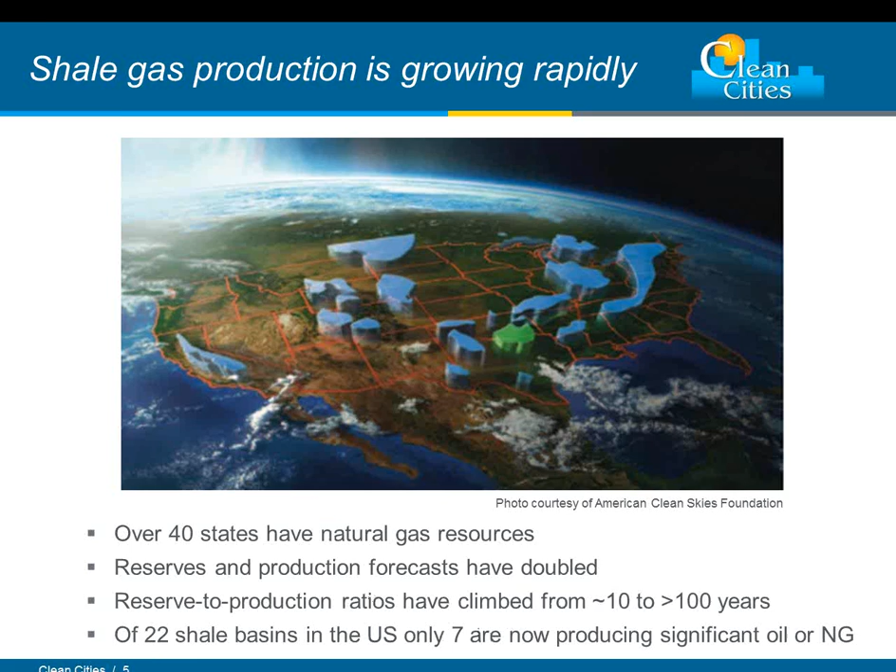The ratio between the amount of reserves and how much is actually produced in a given year has risen. It used to be about 10 years all the time, 10 years of resources compared to what we're actually producing. Now we have over 100 years of resource available. But of the 22 shale basins in the U.S., only 7 of them are currently producing, and so there will be a lot more production in the years ahead.

With all this rising supply, natural gas prices have become decoupled from oil. Back in the 90s and 80s and before that, the price of natural gas and the price of oil kind of followed in lockstep, one with the other. But since around 2005 or so, the price of natural gas has dropped, and it's expected to stay that way. That's the green line in this graph, and this is another one of the Department of Energy's forecasts from the Energy Information Administration. And that contrasts with the price of petroleum, motor gasoline, and diesel fuel, which are expected to rise as crude oil prices rise.

So as a result, there's a large differential between the pump price of CNG and the price of gasoline or diesel fuel. And it's now on the order of $1.50 to $2 a gallon cheaper to refuel with natural gas than with gasoline or diesel, and that's created a tremendous incentive to convert fleets and to use more natural gas in transportation.

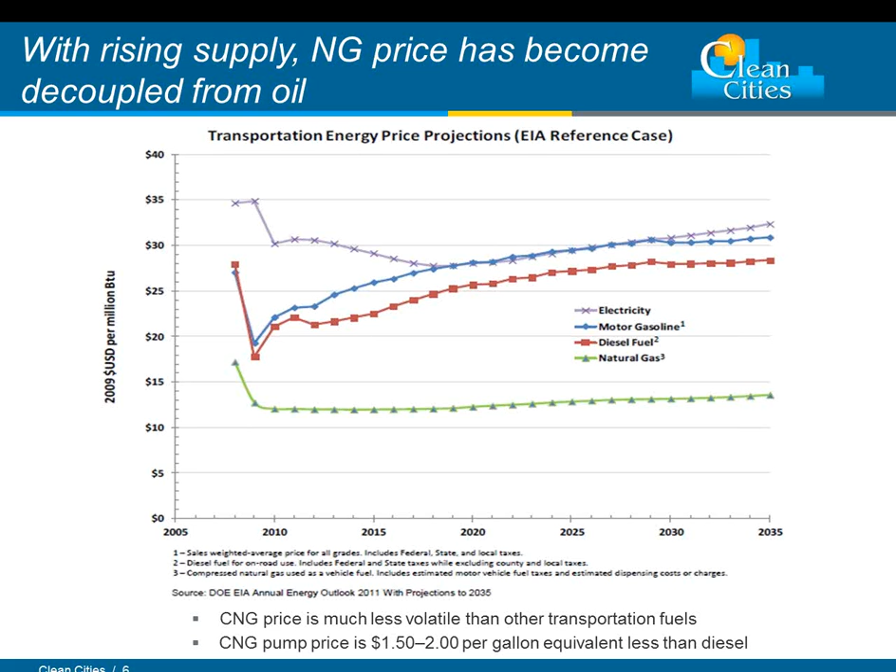So if fossil natural gas is cheap and it's accessible, why are we talking about renewable gas? Why do we need renewable gas? Most of these discussions revolve around energy, economy, or environment.

Renewable gas and fossil natural gas are both domestic resources. They have a domestic supply chain. Price stability is likely to be achievable with both. They both would increase U.S. investments and earnings and improve our balance of trade and improve the number of jobs that might be created, although there might be some regional differences. And both would improve energy security.

So why renewable gas? And the answer is basically because renewable gas has a tremendous environmental benefit. It's a renewable resource. It also benefits from the fact that it's a low-carbon fuel, permits reduced greenhouse gas emissions, and as a result, it's a sustainable fuel.

And the GREET model is one way that we look at how renewable gas is better from an environmental standpoint than fossil gas. I'm going to talk primarily about greenhouse gases, although there are some benefits as far as criteria pollutants as well. The GREET model is a model that was developed here at Argonne. It stands for Greenhouse Gases, Regulated Emissions, and Energy Use in Transportation.

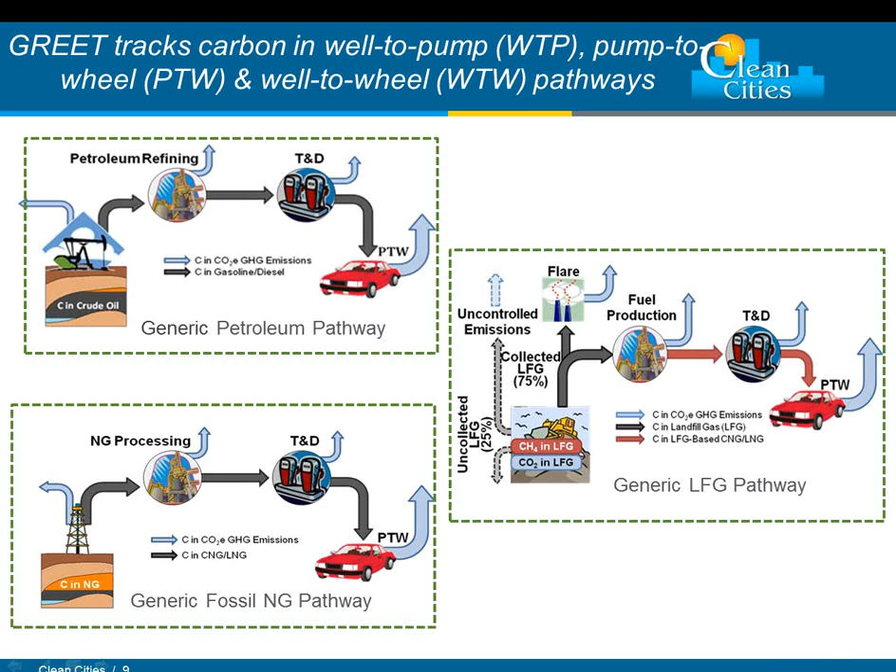Somehow I'm not. There we go.

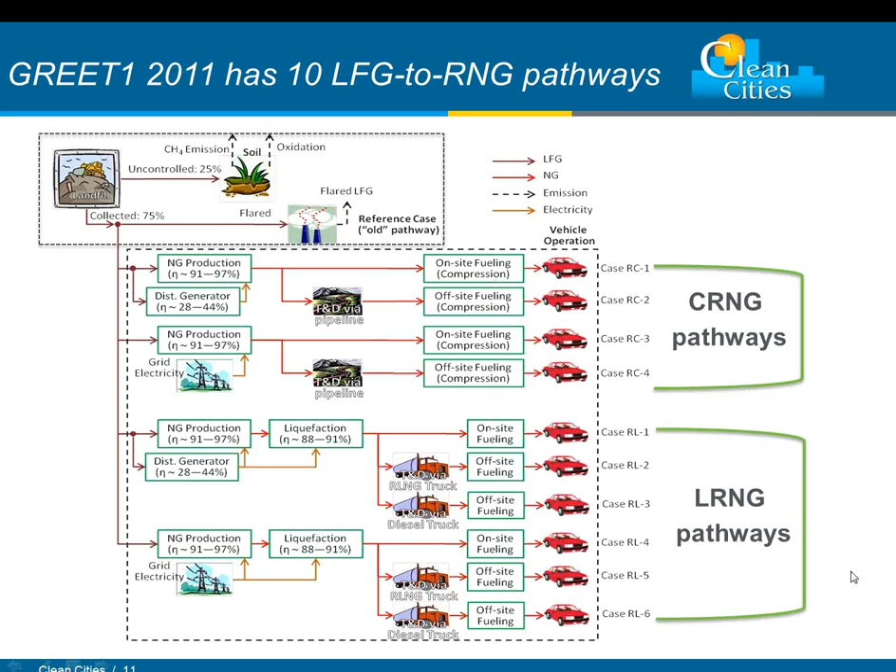When we talk about animal waste transportation in GREET, we're talking about trucking, and we assume 3 miles, certain moisture content. We assume that it was all flared in the reference case. We assume the efficiencies of the digester, and as I said, Jim will go into that a bit more. It varies with the digester technology, also with some of the climate issues and what type of manure. I didn't mention that in the GREET model, we can model 2 different types of manure: we can do dairy and we can also do swine.

We have assumptions in there about what happens to the digester residue, some of the processing and upgrading efficiencies, and some of the assumptions for the vehicle technologies that are displaced. So if it's a light-duty vehicle, we assume a standard gasoline vehicle of 23 or so miles per gallon gasoline equivalent. We assume the natural gas vehicle has achieved the same fuel economy, whereas with a heavy-duty truck, we assume a 6 mile per gallon vehicle, which would be a standard tractor trailer, and we assume that the vehicle that operates on natural gas gets 90% of that. There's somewhat of a degradation because the energy content of the fuel is a bit less.

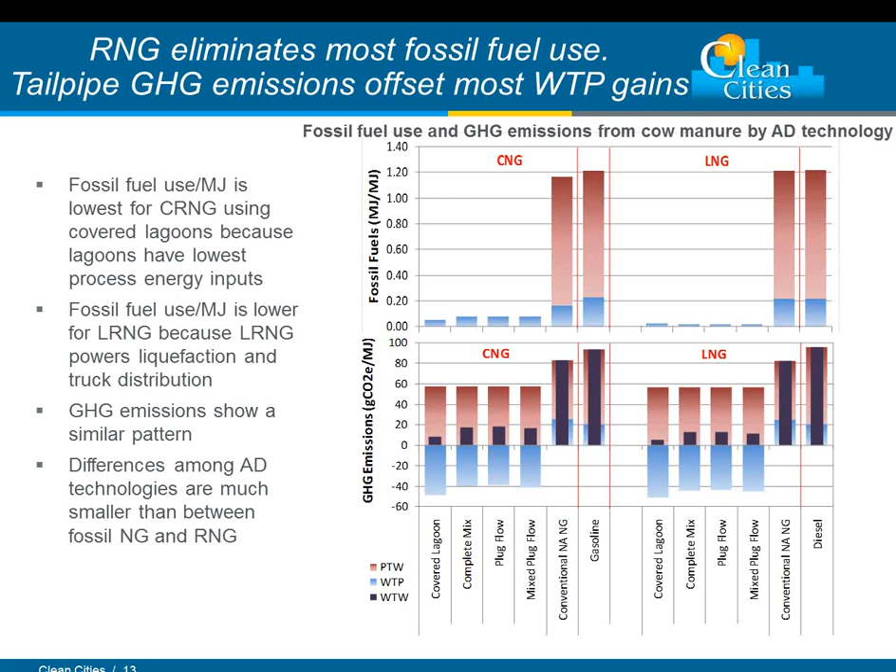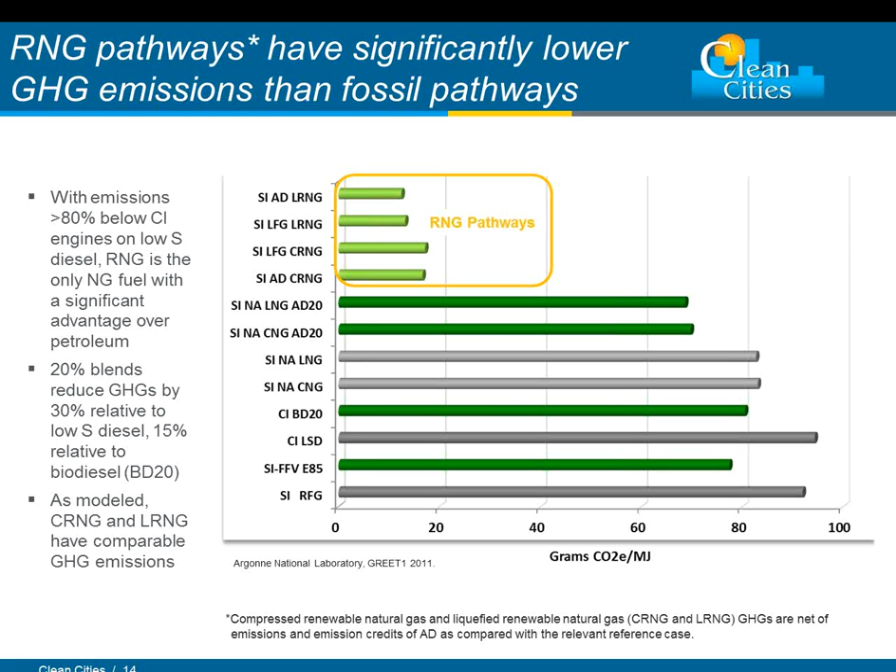So if RNG or biomethane has all of these significant greenhouse gas benefits, the question is why isn't it being adopted in a much bigger way? And I'm going to start talking about that, and then Jim will chime in and he'll talk for a bit as well.

Yeah, Mary Ann, or organizers, I think it would be good if we did change over control so I could use the cursor. Oh, okay. I realize I'm using it a lot. Yeah, and I see it really helps the presentation if the speaker has control of the cursor. Yeah, okay, that'll take a little bit of time then.

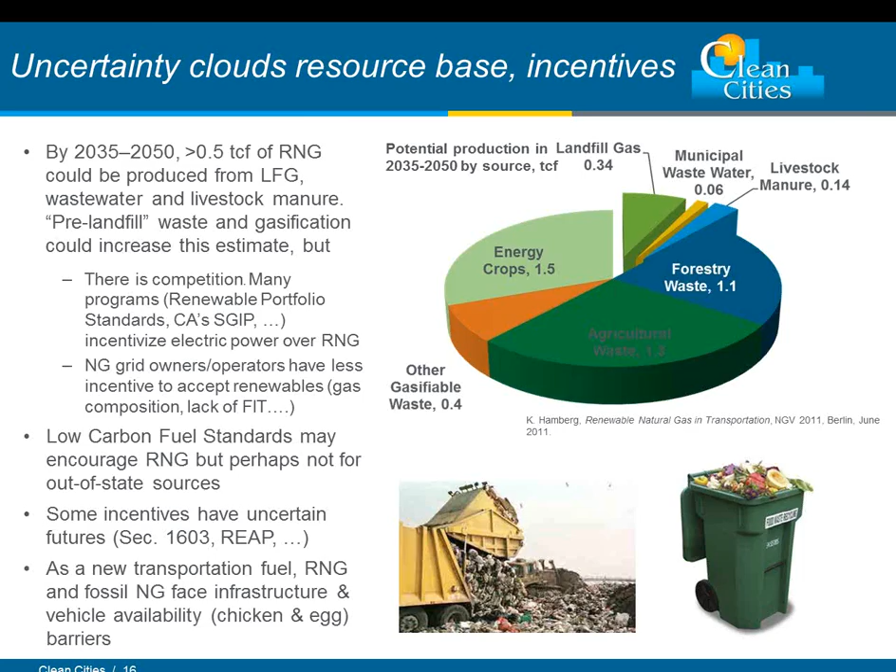While you're switching over to Jim Wergerson, we have a question from the audience that, Jim, I'm hoping you might be able to address in the slides to come regarding why manufacturers aren't making more CNG vehicles. Once you have this wonderful fuel, biomethane, there's this kind of chicken and egg dilemma about the market having enough fuel available to get more vehicles and having the vehicles available to get the fuel. So I'm hoping maybe you can address that.

We'll talk about that. There's a slide in the later part talking about that, but the answer is they are now making more vehicles. The vehicle selections have grown substantially in the last couple of years. They have.

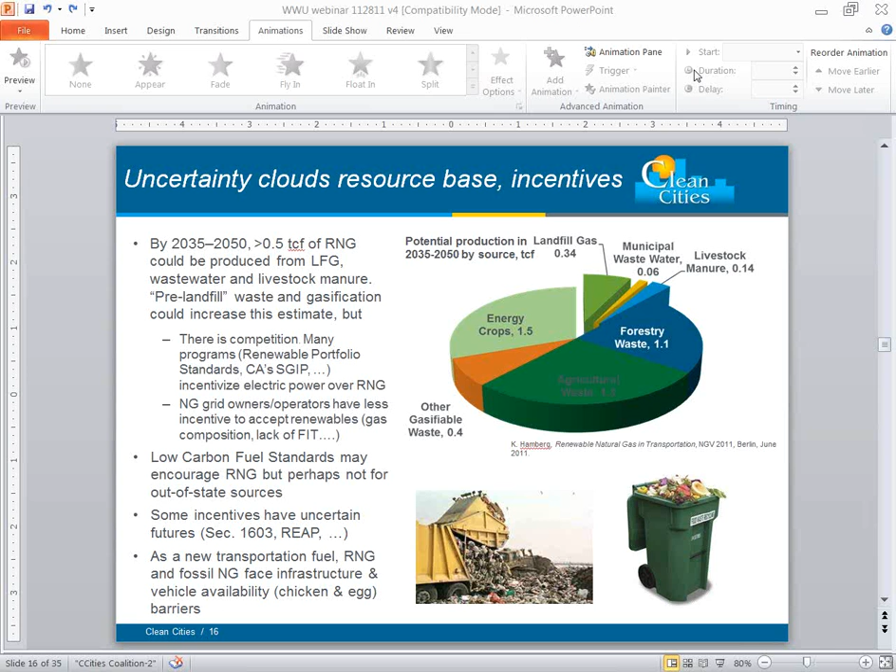Jim, I think you might have the control now. Although I don't have any picture. It still shows you, Marianne. I think he has to be made the presenter. Yeah, that's right. Panelist. I'm still showing as the presenter. You still got the little blue with the arrow in there. There goes something. Okay, I'm no longer the presenter. Should I hit play button? Yes. Download's complete. How do I get the slides? Or is it loading? Bring up your PowerPoint, Jim. Well, Marianne has that. It's the same one. Unless you want me to just try to use the cursor for you. We might have to do that. I guess we messed this thing up here. Well, you have the same PowerPoint. You can just use yours.

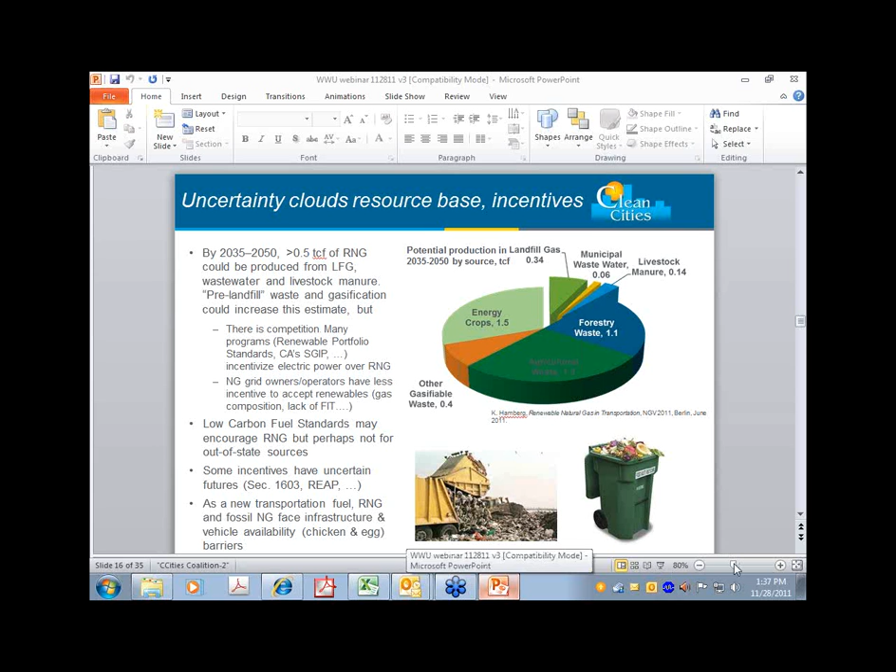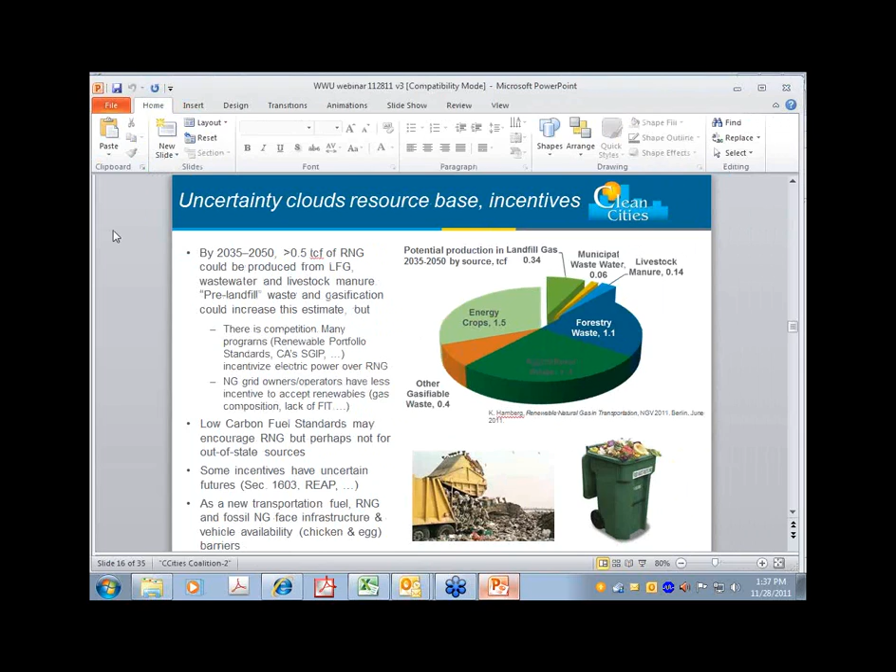Do I have to bring up the PowerPoint? Yeah. I'm trying to get there. WWU webinar? Yeah, I got it. Is it on there now? Yep. I just need to go down to where we are. And do I have control? Is the cursor going? Yes. Just make it full screen there, Jim. Where is my full screen? Top right? You got to minimize the size thing. Push F5. That's the easy way. Catching up here. I think we're set now. Well, thank you, Marianne.

Let me carry on here, and I'll start with this pie chart here. I've already added up all the contributions, it turns out to be about 4.7 trillion cubic feet. And most of you know a trillion cubic feet is the same energy content as a quad. And so that's a lot of energy. A quad is 10 to the 15th BTUs. The United States annually uses 100 quads, 25 quads in natural gas. So there is a tremendous potential for renewable natural gas.

In saying that, though, I have to also be honest, this is a combination of anaerobic digestion and thermal gasification. And the majority of this is thermal gasification, and the majority, this dark green here, is wood. And so the economics of that is not as good as the economics of renewable natural gas. And so the intent of this slide, which was put together by Karen Hamberg of Westport Innovations, is to get the attention of the federal programs that indeed there is a significant amount of renewable natural gas out there.

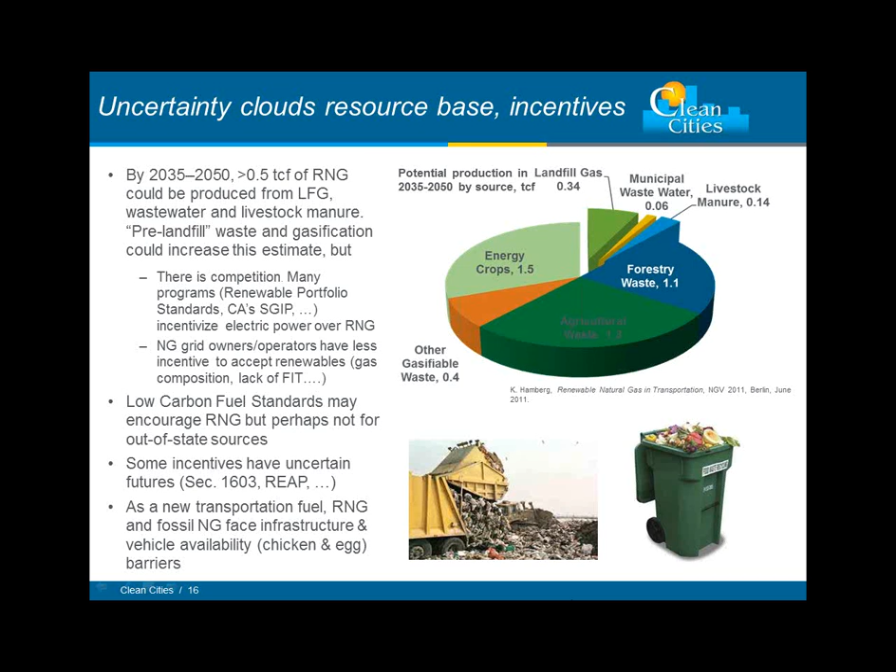From our point of view, that's kind of a top-down scenario. Get the Washington crowd interested in supporting renewable natural gas, but we're a little more interested in the bottom-up that Clean Cities represents. Let's get a few good programs and show that they indeed work and grow from the bottom up. And I think there is a bigger potential in doing the bottom-up scenario than waiting for Washington to solve our problems. And so with that, let's look at the next slide, slide 17, which again came from Karen, which shows the cost differences between compressed natural gas, gasoline, and liquid natural gas and diesel.

I'm not going to go through all these slides, just point out a few highlights, the first of which is for raw material costs. Obviously, for gasoline and diesel, raw material is the major cost. If you look at the raw material for renewable natural gas in the green area, you can't even see it, and potentially it's negative if you include tipping fees. So the cost really associated with renewable natural gas is in the production and cleanup of natural gas, and that's what we'll talk about in this webinar.

Again, the costs are about the same. We'll see this come up again and again. Cost of natural gas at NYMEX typically is projected to be $4 a million BTU, whereas this slide has renewable natural gas at $8, and we can see some data out there which shows that renewable natural gas could be from $5 to $9 a million BTU. And just for a point of reference, thermal gasification usually is $10 a million BTU and up. And so that's why our interest, at least initially, is in renewable natural gas and not in thermal gasification techniques.

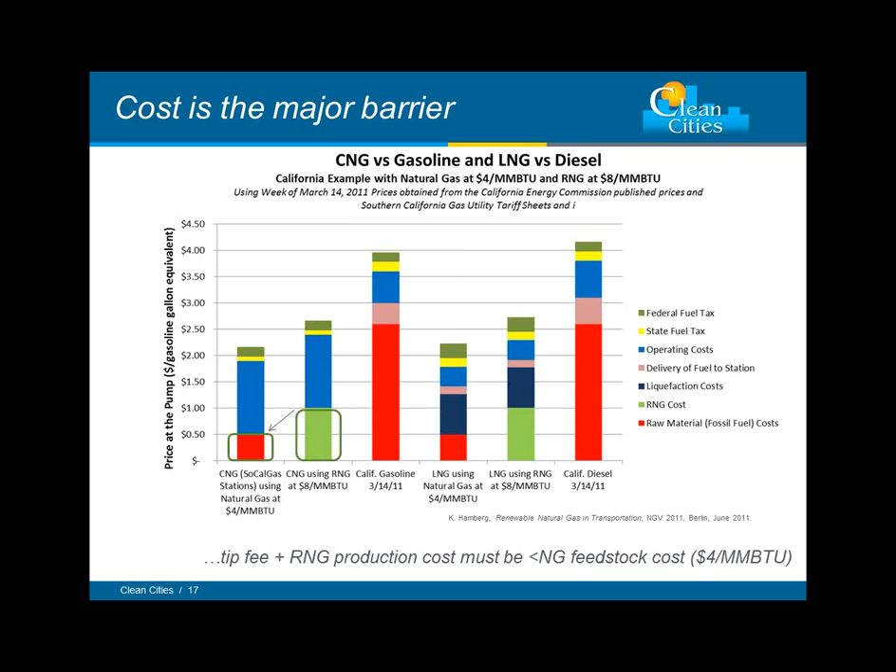All right. The following slide is really the cost related to facility size. This data came from Patrick Chen, who worked at CalSTART. He did it in 2010, an economic assessment of biogas and biomethane production from manure, and I've taken the data from that white paper. The important thing here is you can see facility size from small, which is 100,000 cubic feet a day, up to 1 million cubic feet a day. Looking at the total cost in dollars per million BTU, you can see that the price obviously drops as you go to larger sizes. We refer to that as economy of scale, or sometimes bigger is better. You'll see that come up a little later.

But the majority of the cost is really associated with the upgrade, which is the cleanup cost. If one looked closely in this report, one would find that for the anaerobic digesters they consider 4 different types. There's a range in the cost of those, but that cost was not the major contributor to the total cost. It was really the cleanup cost. And what are we talking about as far as cleanup costs? This is from manure, so we were looking at the cost to remove the hydrogen sulfide, get the CO2 down to less than 4%, and water removal, so that the biogas could be essentially upgraded to a biomethane fuel.

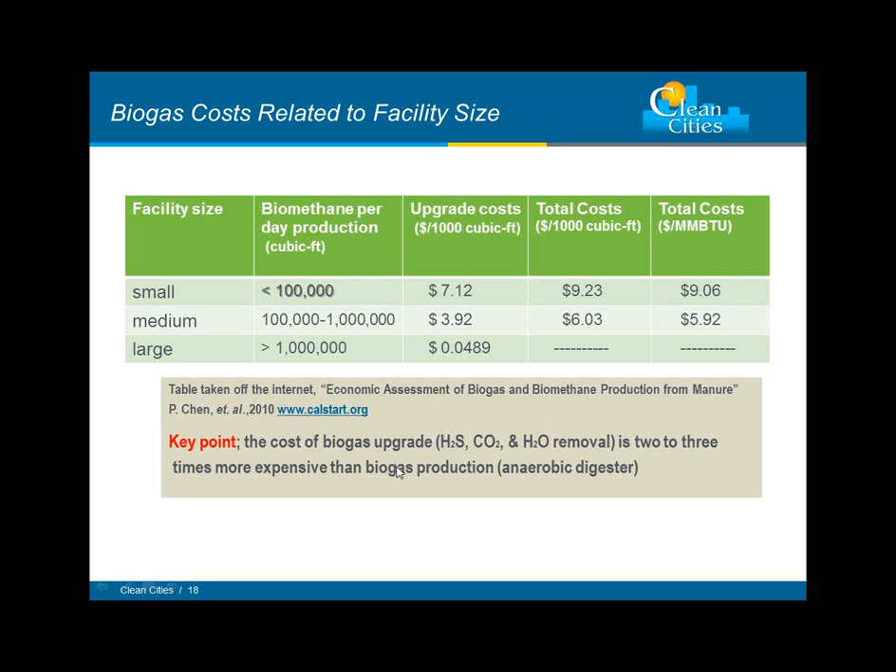There are various types of anaerobic digesters. Mary Ann had a list of them, and any paper you read will have maybe different terminologies for the same digesters. I'm going to go through this rather quickly. If one wants to know more about anaerobic digesters, I would recommend just going to Wikipedia on anaerobic digesters; it's a nice, clear discussion of what anaerobic digestion consists of.

Let me go back and discuss the various types of digesters. You have a covered lagoon. Those are used in farms where you have plenty of space. They're the simplest and the least expensive. However, since you don't have temperature control, they're also the slowest at digesting the material. So if you have a lot of extra space on your farm, you can certainly go with covered lagoons, and the cleanup is also fairly straightforward. Plug flow is the next simplest, which is basically an airtight building that you move your organic materials into and push through as it digests. Again, it's very simple and cheap.

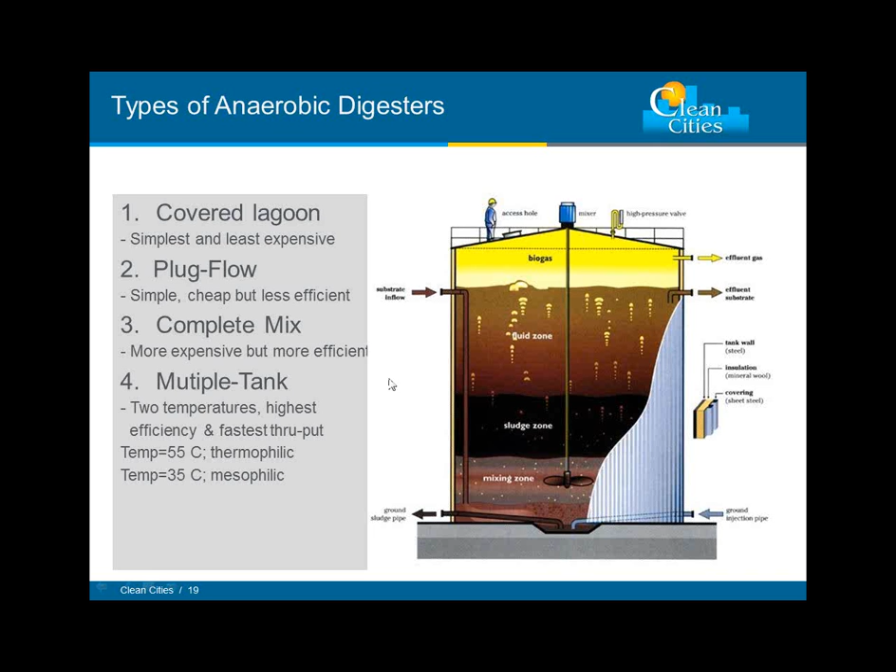And so obviously hungrier bugs are preferable, but it does complicate the design and operation of the reactor when you use a 2-temperature system. And to my knowledge, most systems coming out now, except for our farms, of course, are the complete mix type of system. Obviously, if you grind up your material, it reacts faster, and mixing it also speeds up the conversion to methane.

As far as biogas upgrading, there I've listed 5 cleanup techniques that are available. The first 3, water washing, pressure swing adsorption, and membrane, are available commercially. So you can find companies or manufacturers that will supply you these on skid-mounted units.

The non-aqueous solvents, which is basically a washing technique where you don't use water, is sometimes commercially called, not siloxane, it's Selexol. Siloxane is the silicon material you need to get rid of. But it can be methanol, or a glycol mix, something that has a CO2 solubility in it. And basically it is simply a wash technique.

You can also remove CO2 by reacting it with amines or potassium carbonate. That has a high selectivity for CO2. The amines react readily with CO2. However, the problem is that they do bind readily with CO2. You need a lot of heat to dissociate or break those bonds, and so there are heat penalties when you use these systems.

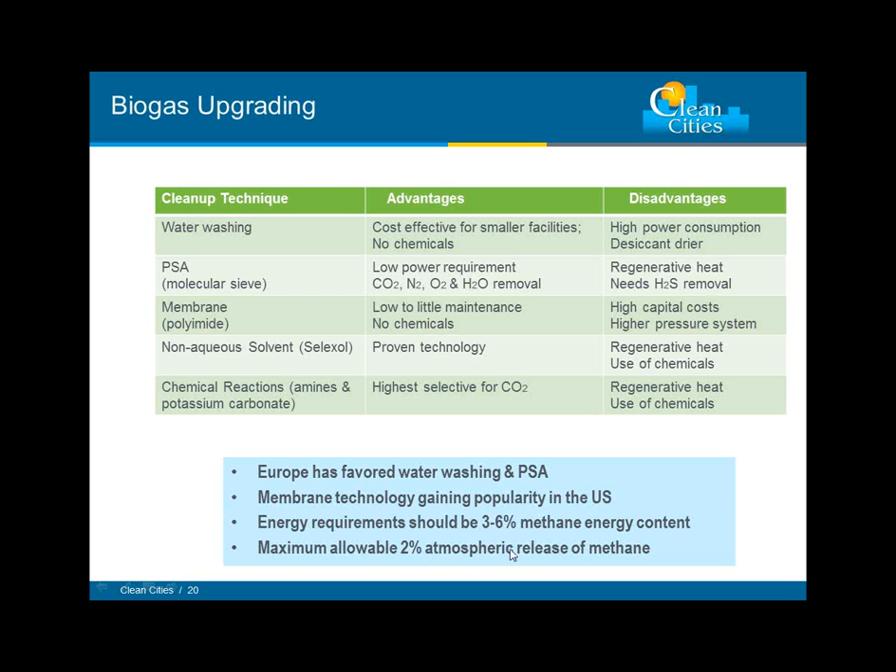In looking at a cleanup system, one should say, well, I really only want to use 3 to 6% of my energy content of methane to clean up the gas, and also have only 2% atmospheric release of methane in dealing with the system.

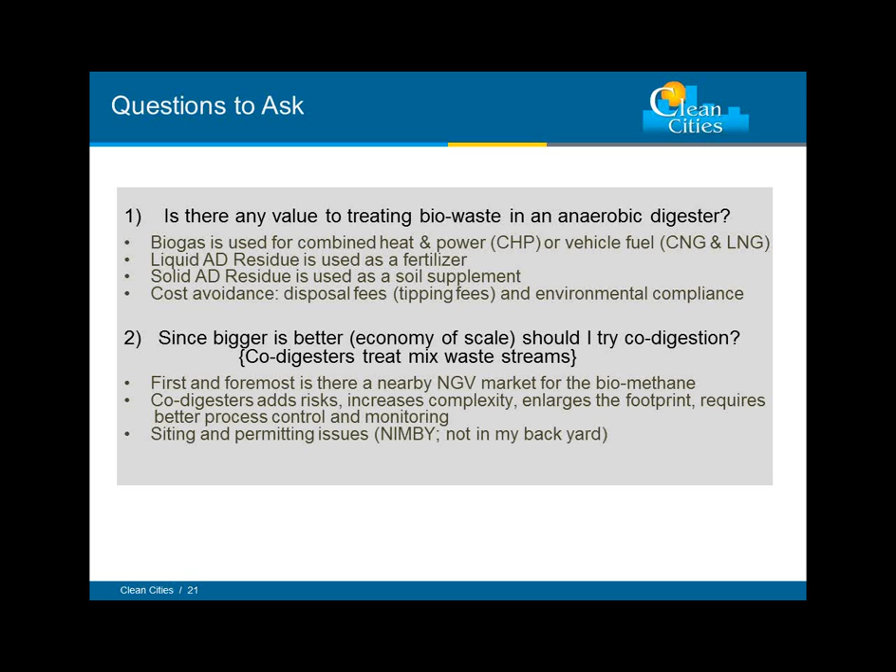However, you do have a problem when you get bigger. It's siting and permitting issues. It's the old NIMBY, not in my backyard. Again, if you're a farmer and you have cattle or a dairy farm, you don't necessarily have that problem. But as you move closer and closer into the cities where perhaps the vehicles are, you're going to also potentially have siting and permitting issues. And if there's one cost that's constantly overlooked, it's the siting and permitting issues.

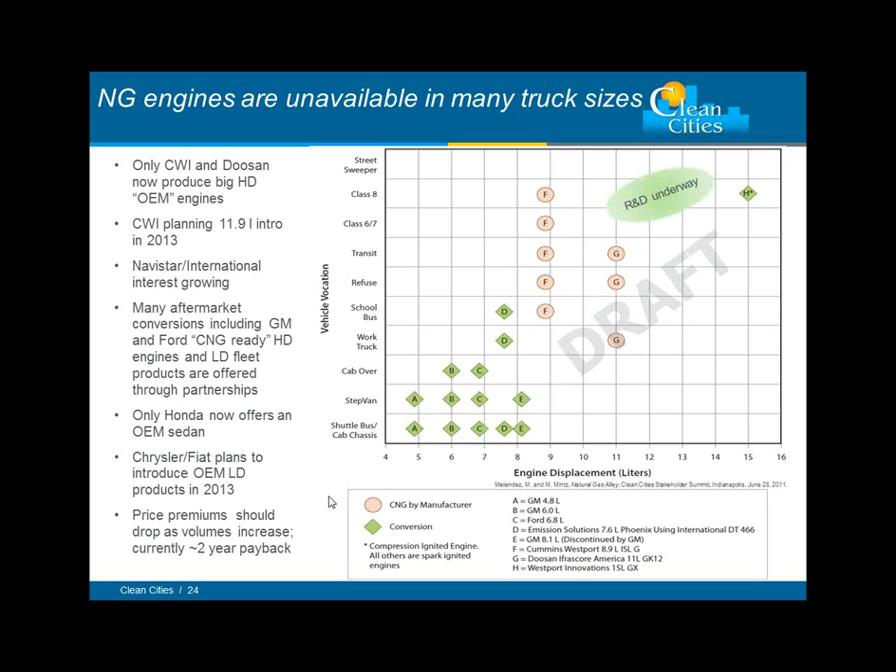And so sometimes doing webinars actually helps the presenters as much as the audience. In this particular case, in the past, I've always followed conversion kits. However, they never really have taken hold in the United States, because if one would convert an engine from gasoline or diesel to natural gas, you had to prove that the emissions met the EPA emission requirements of that year. So that is a very difficult task.

However, now with the diesel trucks coming out with cleanup systems of PM traps and selective catalytic reduction systems to meet the EPA 2010 tailpipe emission standards, you can convert those trucks to natural gas.

And also, EPA has kind of backed off the rules somewhat, so that if you take an older truck and put on a conversion kit, you only need to show that the conversion kit reduces emissions and not necessarily have to meet the current 2010 standards. And so because of that, there are now some dual fuel diesel engines, natural gas diesel engines available.

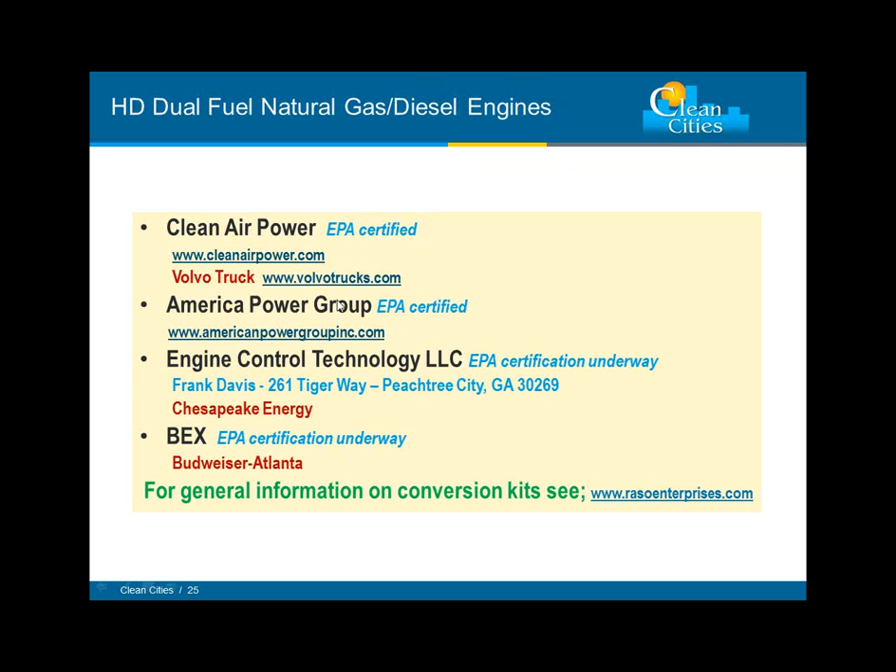And so it looks like that kind of hurdle has been removed, and so again, we'll be able to have more offerings of trucks, perhaps dual fuel trucks, that will make renewable natural gas in more demand.

All right. This is the Mary Ann slide. I'm going to go through it. You want me to? I can talk if you want. Okay, go ahead and talk then.

Okay, basically, the chicken and the egg. The other side of it is the stations, and as of the middle of this past year, there were less than 1,000 natural gas stations in the U.S. and only 44 LNG stations, and less than half of them were open to the public. And so that's been a real problem. And companies like Clean Energy are starting to really go after that problem.

This past July, Clean Energy announced plans for what they call America's Natural Gas Highway, and they're planning to develop 150 LNG stations in conjunction with truck stops, the Pilot Flying J travel centers, within the next 2 years. And they've acquired $300 million, $150 million from Chesapeake Energy, and another $150 million from 2 Asian investment funds, as a first installment on that program. It will cost significantly more than $300 million, but that's a very large first installment.

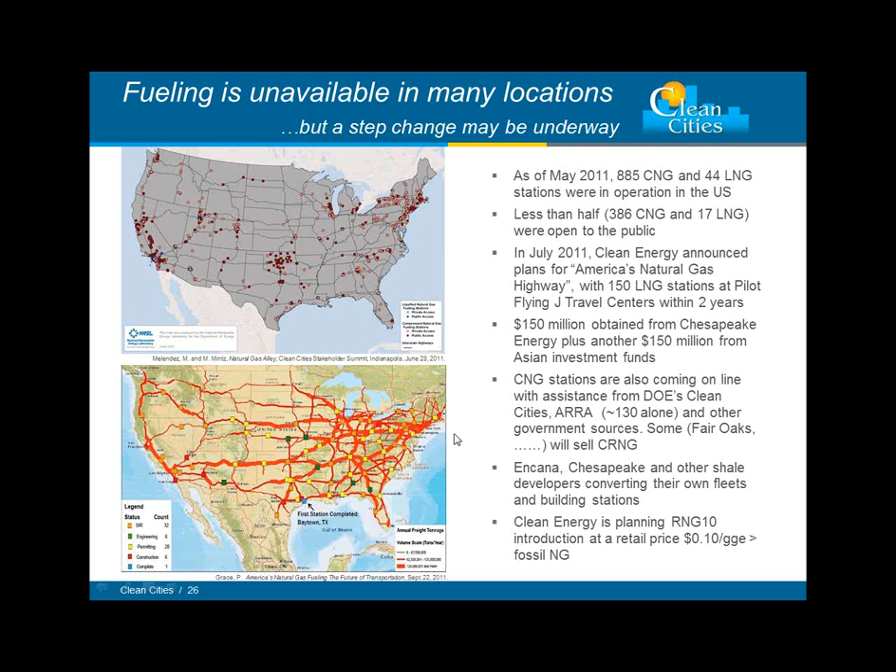Improved energy security and balance of trade are the main benefits of increased reliance on natural gas. And without renewable natural gas, increased use of natural gas will have very small greenhouse gas benefit. I did not discuss that in great detail, but the EPA has increased their estimates of how much methane is emitted in the process of producing natural gas, either from shale gas or from conventional wells. As a result, the benefit of natural gas compared with petroleum diesel or gasoline is less than what we've been talking about in the past, which provides even more of a need for renewable gas. Although dependent on the specifics of each installation, renewable gas can reduce greenhouse gas emissions by 80% or more. Sometimes it's almost 100%.